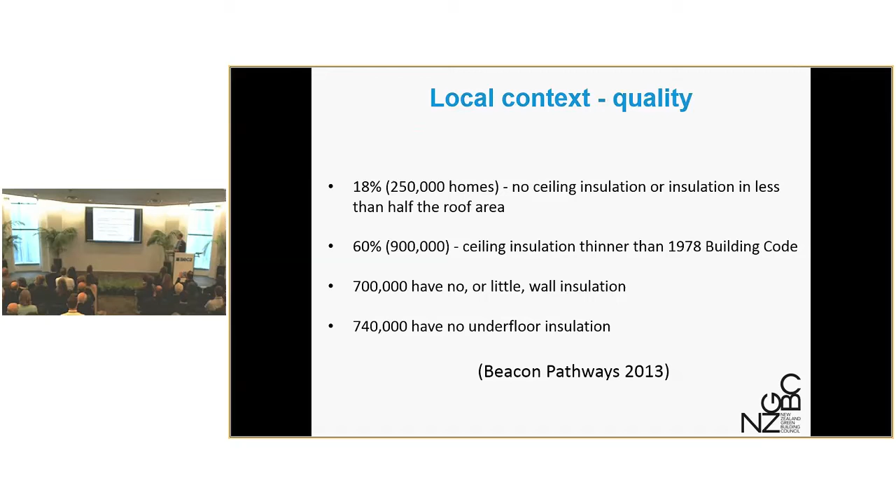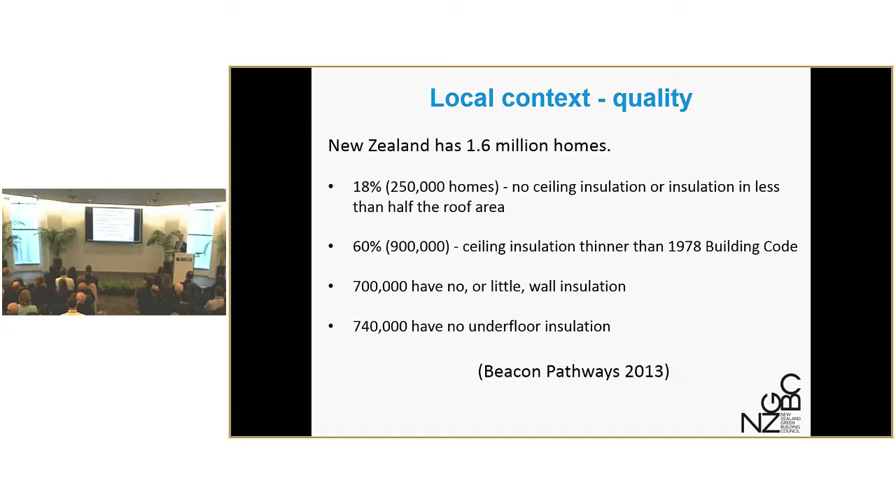Just a bit of context, something I'm sure you'll all recognise. In New Zealand, there's a particular reason for more interest. We have around 1.6 million homes, and a very poor quality housing stock. Just to pick out one figure, we have 700,000 with no or little wall insulation, and this is impacting significantly on many people in our population. We have 40% of our homes that are damp or mouldy, leading to one of the highest cases of respiratory disease in the Western world, costing us $6 billion a year and impacting 700,000 people.

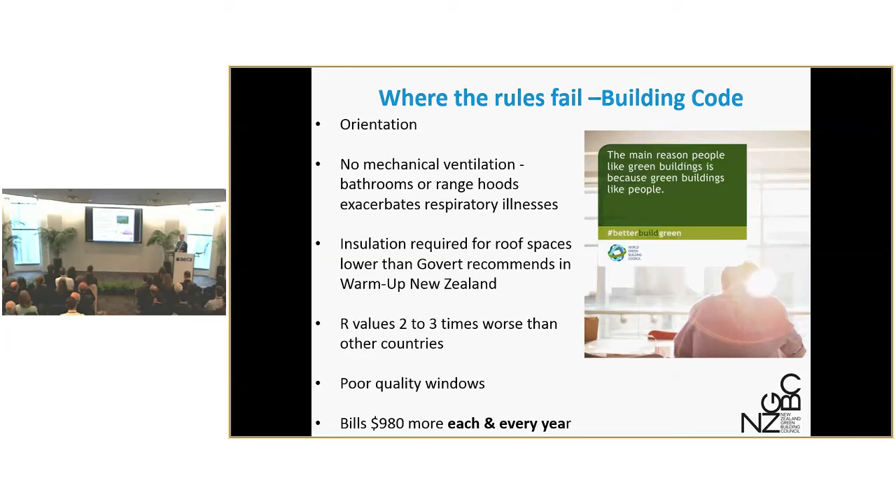We know that the building code isn't working. I've been away for 15 years, I've come back to New Zealand and toured the country. Every single week, somebody tells me how embarrassed they are about the New Zealand building code. Sometimes it's 10 times a week. People say they're just embarrassed by it. Why is that? Well, it's because it doesn't incentivise orientation, doesn't actually require mechanical ventilation in the bathrooms or with range hoods. Insulation required is significantly below what many people would suggest. The R values are 2 to 3 times worse than we see in Australia, the UK and Ireland, to give an example. The windows are not always of decent quality, and all of this leads to significantly higher costs for people.

So we developed a rating tool. The building community and our board and our members said, let's start developing something to drive change. So Homestar was created about 5 years ago to focus on reducing operational costs and a better quality home.

And it provides an assessment of apartments, but also homes, so a range of home types. Interestingly, we've seen a tenfold increase in uptake of Homestar in the last 2 years. We've gone from 650 registrations in quarter 2 2015 up to over 6,700 homes now being registered.

So is that good? It's good, right? Bring it on. We're really excited about that, and as part of me coming on board, I looked at this and thought, well, that's tremendous. Let's get a sense check of whether it's right for the market. That led to a discussion with the industry, and Leanne will talk a little bit more about that, and it led to the version 4 changes that the team took forward.

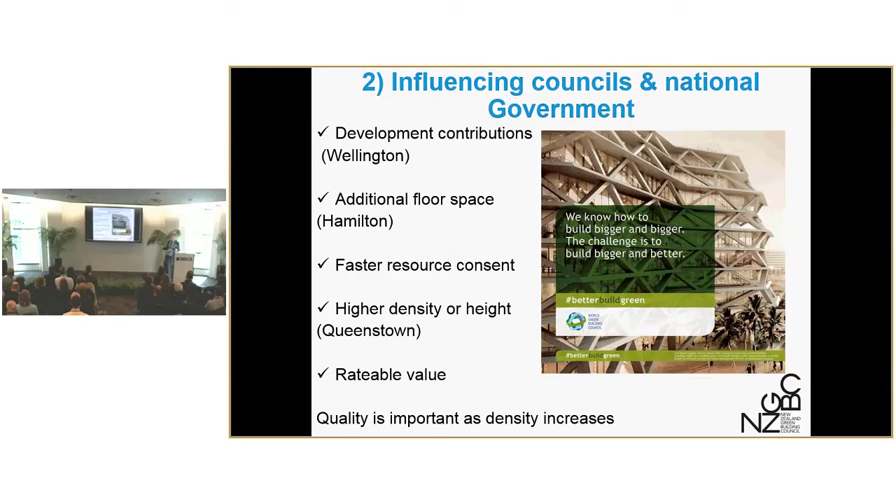We are getting denser as a nation, building closer to each other. As we do that, quality is going to be important, right? Kiwis aren't always used to having someone so close in proximity. So if we can build more sound insulation, more daylight, more warmth, people will be happier in those situations. This is a pretty major issue, I think. How can we deliver improved quality? Well, there is an independent verification system for that.

We're increasing our reach to get more buy-in, so I think this is important to note. We have 30,000 people receiving our different e-bulletins each month, 10,000 people on social media connecting those, and we're getting asked about once a week for media commentary in the press, and having some good discussions with ministers and officials.

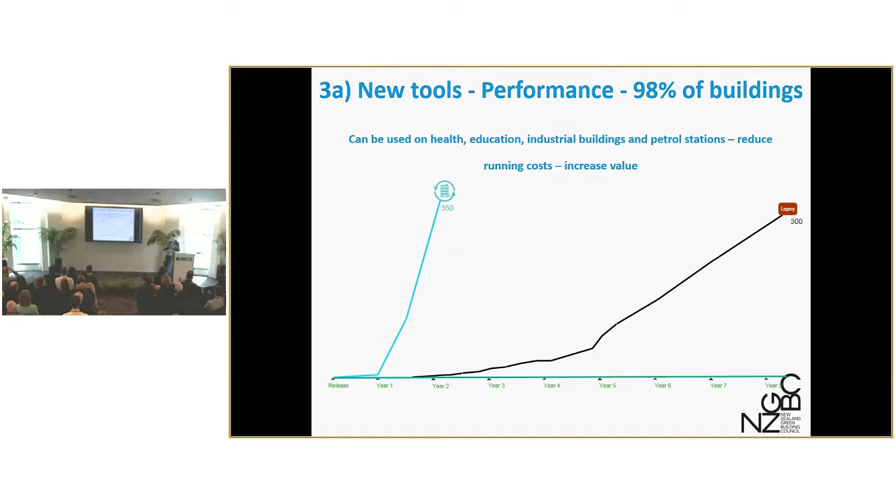I'll skip over this, but we're bringing out a new tool for the performance, the operational costs of buildings. Just to note that it will cover health, education, industrial buildings, and even petrol stations.

Right, so I've almost finished. I just wanted to touch on something which I think is interesting, because, in a way, what we do, it's a bit geeky, isn't it? Rating tools. What are rating tools? People say, what about this great new piece of kit or a sexy thing that we do? We've got a better insulation method or better solar panels.

And that is exciting, but what we're trying to do is fundamentally change the system, right? Not just the occasional building, we're changing how we talk about things. I just want to illustrate to you the power of that and what that can do to a marketplace. So, in Australia, they have a scheme. Does anyone know NABERS? Yep, so a few people. So they had NABERS in Australia, and they brought it in 2007.

He commissioned a report, 130 pages, spent quite a lot of money, and he was asking for them to get rid of NABERS. The report comes back. It finds that the benefits of an energy labelling system for commercial buildings was over $40 million to the commercial building sector of Australia. The productivity and health gains to those people in those buildings was over $140 million, which he excluded from the core analysis.

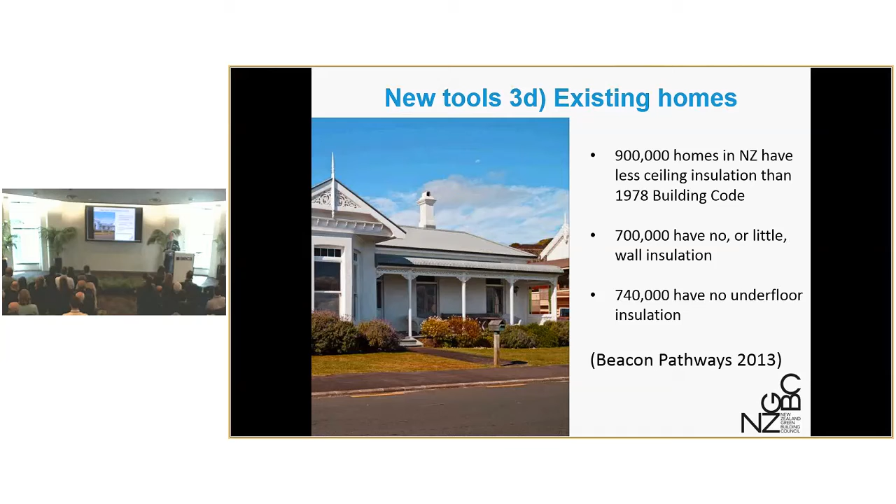Just quickly to note, quietly, we're bringing out a new tool for existing homes. In Homestar, we've separated existing homes from the tool, and in the first quarter of 2018, there'll be a new, simple, easy-to-use tool for existing homes which focuses on insulation, ventilation, and efficient heating systems to deal with this issue. It's called HomeFit. We've got quite a bit of interest in that.

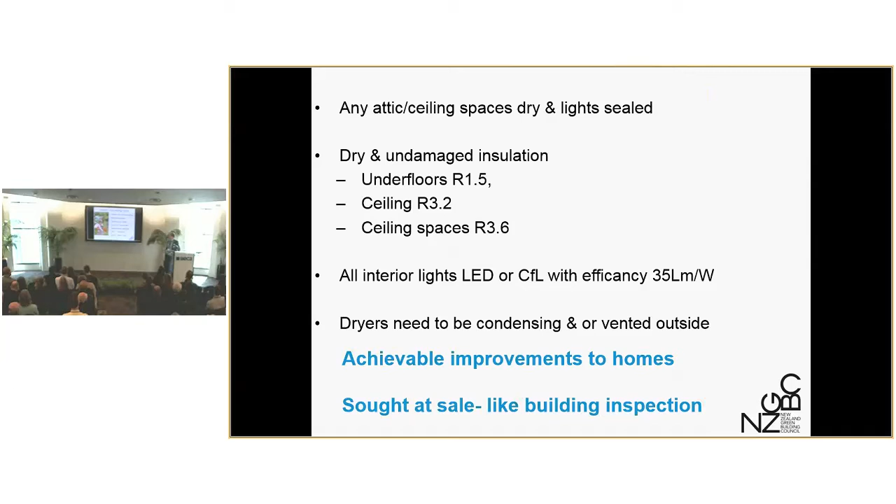So we've created a new tool. We're getting buy-in from government, and we're going around generating uptake and aligning that with the processes you need for an effective rating tool.

I just thought I'd finish with a little story. Some of you probably know this - a house that was pretty cold and damp, and Zane's children were getting sick quite often. They retrofitted that to Homestar, and he could say that his kids were getting sick far less often. So I thought that was quite powerful to finish with a human story.

Okay, so I hope that was useful. Now you guys have to do some work. I'd be really interested in your thoughts on all of that, and if you think we're going in the right direction, or your thoughts, also projects you might be working on and how that feeds in. So I have a bit of this time, and it's also an opportunity for you to ask some questions before we get into the detail of Homestar particularly. So if you have questions or thoughts on any of that, or disagreement, I really welcome them. You can have a bit of time to allow for that.

It says waiting for hands to go up. Well, if not, no, okay, well here's a question: are we on the right track? Does that seem like a good way forward? Put your hands up if you think we're going in the right direction. We'll do it that way. Okay. Now don't feel bad, put your hand up if you think we're in the wrong direction. Okay, well that's useful, and it's all right, feedback's good.

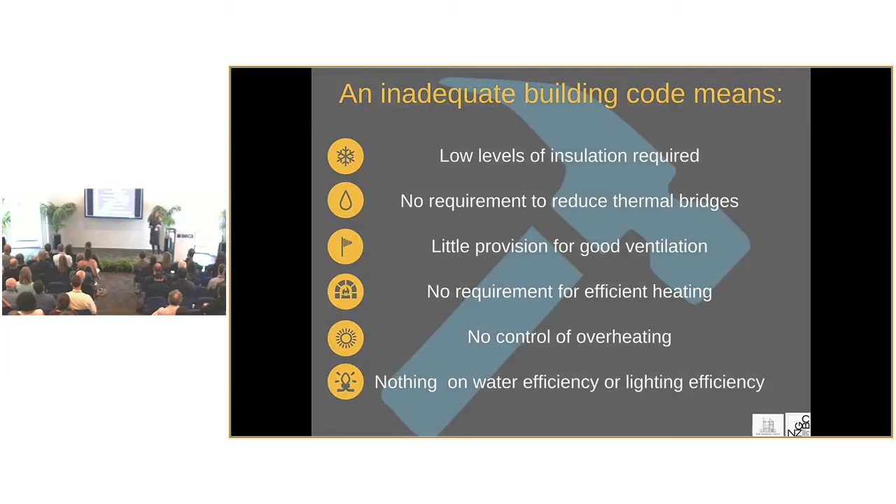Doom, gloom, right? So Homestar attempts to address a lot of these issues and provides a method for verifying that we are achieving in those areas. What's popped up around the outside here are the different categories within Homestar, and you'll see those concepts fit into those categories. The concepts themselves within the Homestar rating tool are the credits—those are the ways that we go about achieving and addressing each of these areas.

So today I'm going to talk to you—I wish I had a lot of time and could talk you through the whole thing and give you all of the bits of Homestar. But I think, A, you would probably be a bit bored after a while, and B, we really don't have enough time for that. So I'm just going to talk about a few of the important bits today. But if you want to talk to me about something you think is really important, or you're interested to know about that I didn't cover, come and find me and I will be happy to talk your ear off about it.

So I'm going to start with thermal envelope performance, which really means we want our home to be doing a good job around the outside—the walls, floors, and ceilings—keeping the heat inside the house and not letting it escape outside.

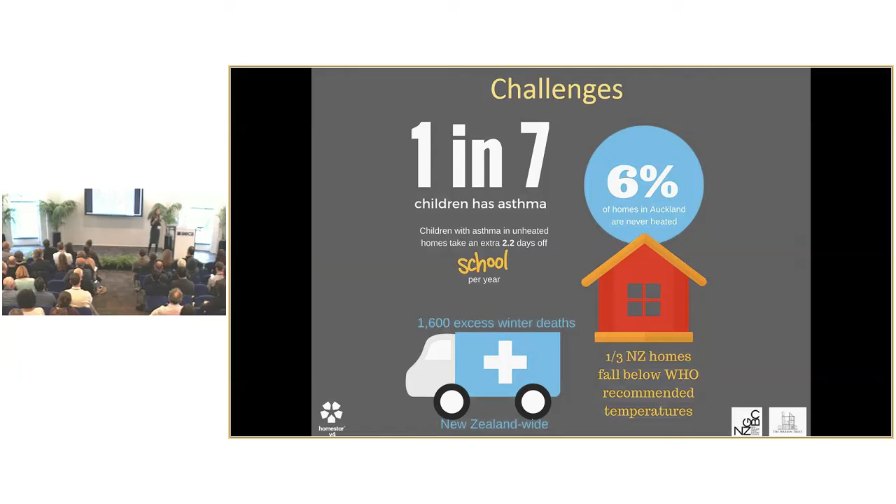And it's cold a good 7-8 months out of the year. We basically live for the 4 months of summer. I then went to school in the balmy tropical climate of Michigan. Those of you who know your US geography know I basically went from cold to cold. So I came here and I have never been so cold inside a home than when I moved here, and that was a long time ago.

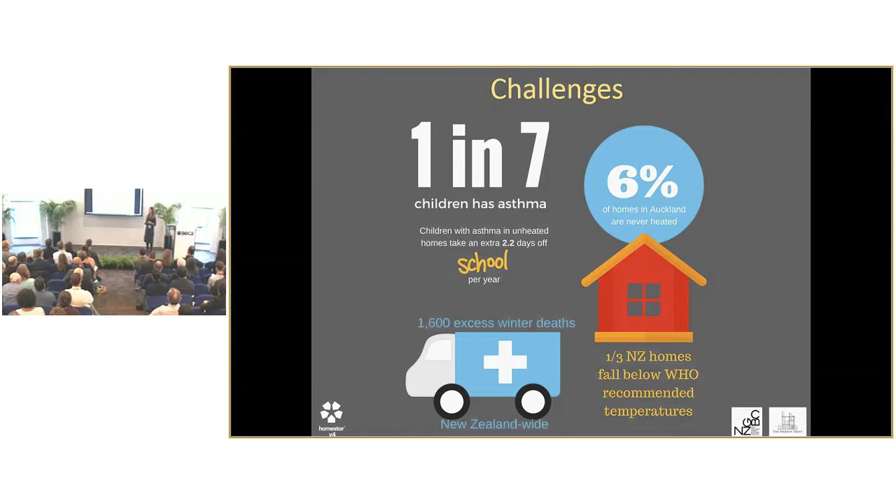It was 14 years ago. And I continued being cold for a very long time, until I think my husband got really sick of me complaining about being cold all the time, and we built a passive house. I'm not cold anymore, and it's fabulous. But the point is that we actually have really cold homes. And you meet a lot of people from overseas who come from cold climates, and they complain about the cold here as well. Am I preaching to the choir? Yes, okay.

Aside from those challenges, the house condition survey showed us in 2015 that we have a legacy of poorly insulated, damp housing with inadequate heating. The International Energy Agency just did a review and said the building code is below the standards required in many other countries.

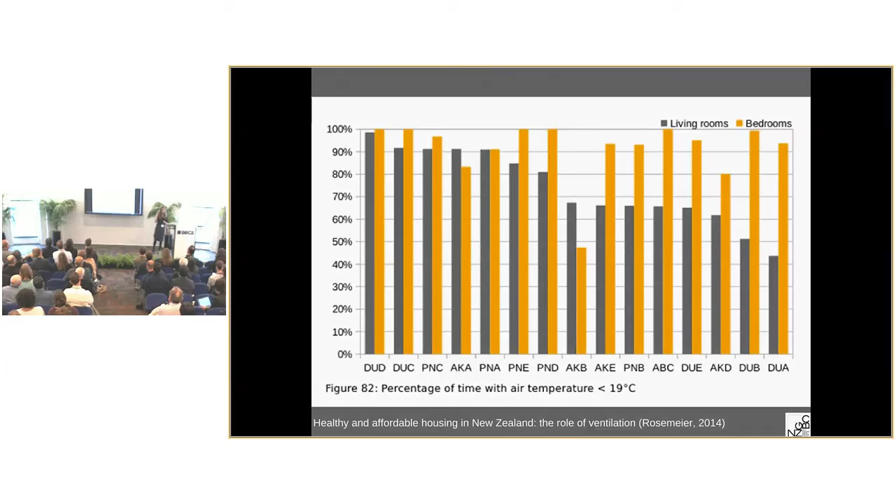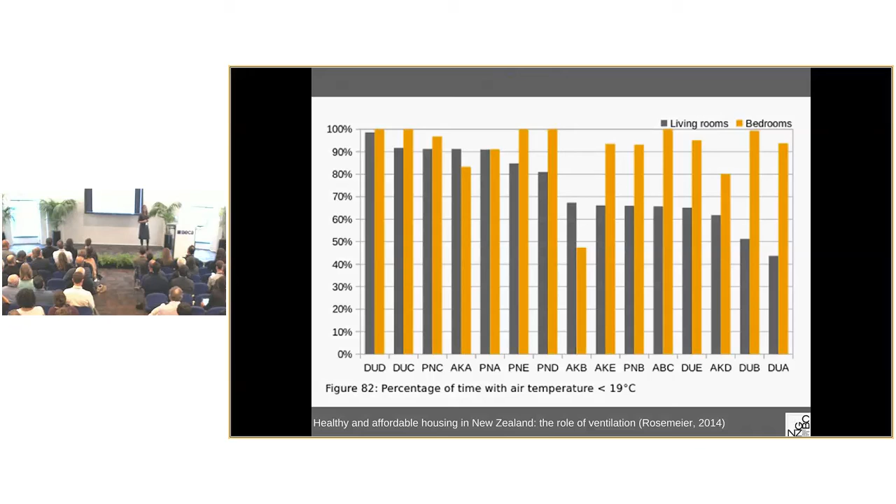Now you say, what about new homes though? Surely not our new homes. Well, this study was done on homes constructed post-2000, a range of typologies across New Zealand. What you're looking at is the percentage of time they were monitored over 2 weeks in winter, specifically the percentage of time air temperatures were less than 19 degrees Celsius. The yellow is the bedroom, the grey is the living rooms. They didn't do very well, so even new homes are still not doing well. Not all new homes, but a lot of them aren't.

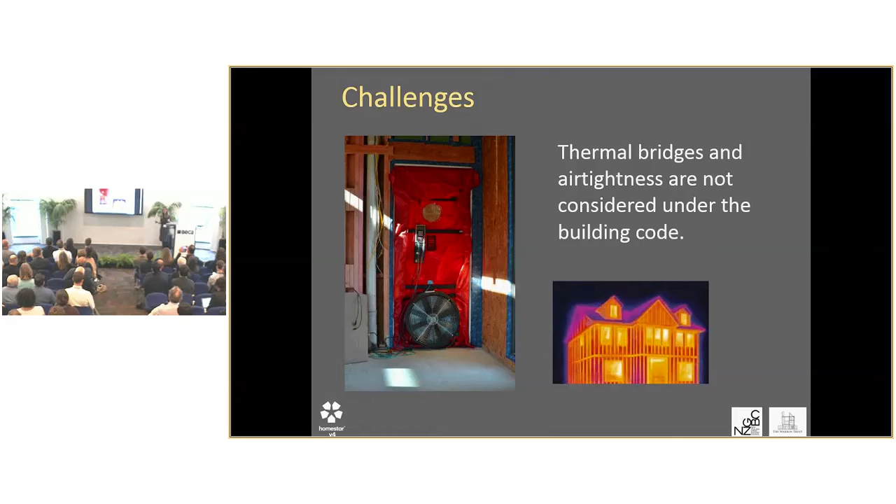And we also, as I mentioned before, thermal bridges and air tightness are considered in other countries. The UK, for example, has standard air tightness testing now. They are considering these things.

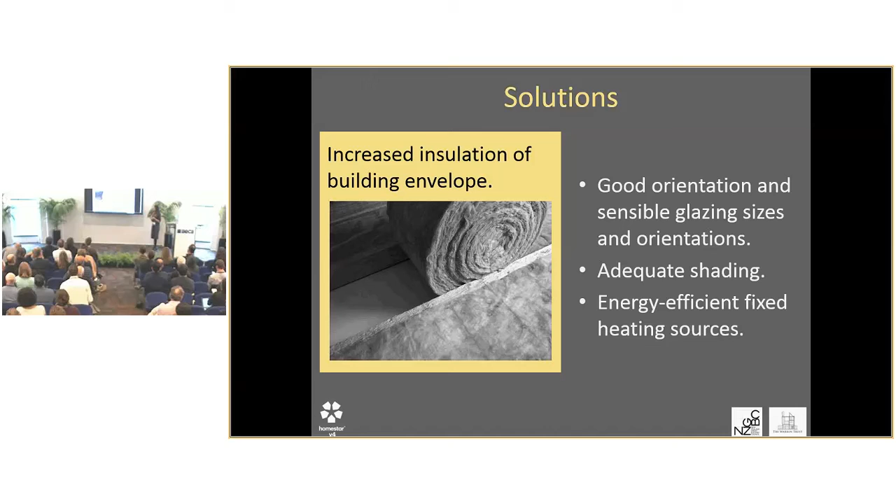So now that I've totally brought the tone down here, what are some solutions? We can increase the insulation of our building envelope - that's not just our walls, it's also our ceilings, our floors, and our windows as well. We can think about good orientation, potentially sensible size of our glazing, the orientation of that glazing, and having an energy-efficient fixed heating source.

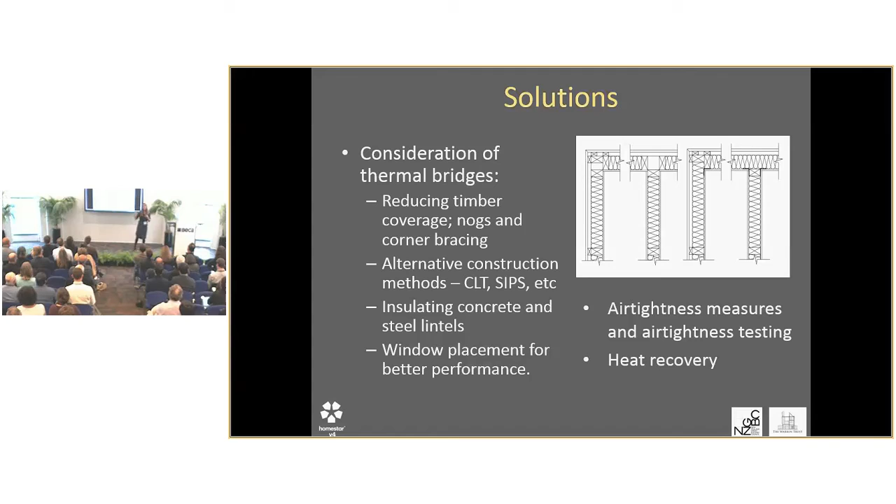So some other things we can do: we can consider thermal bridges. Now, I'll point out that I'm going to talk about some commonly accepted, very small steps, and also some more aspirational things. There will be some controversial things I say that you don't necessarily agree with, but I'm going to mention them because they are practiced - most of them have some sort of industry-based practice internationally, and I do want to touch on them.

So there's other things we can do. We could reduce timber coverage - that would mean reducing the amount of nogs we use, reducing the amount of corner bracing that's put in. If you don't want to do that, consider alternative construction systems that reduce thermal bridging, things like SIPs or CLT panels. Making sure that if you've got concrete or steel lintels penetrating through your thermal envelope, that they're insulated from the outside. We can change our window placement so it's in line with the thermal boundary of the house rather than sitting outside of it.

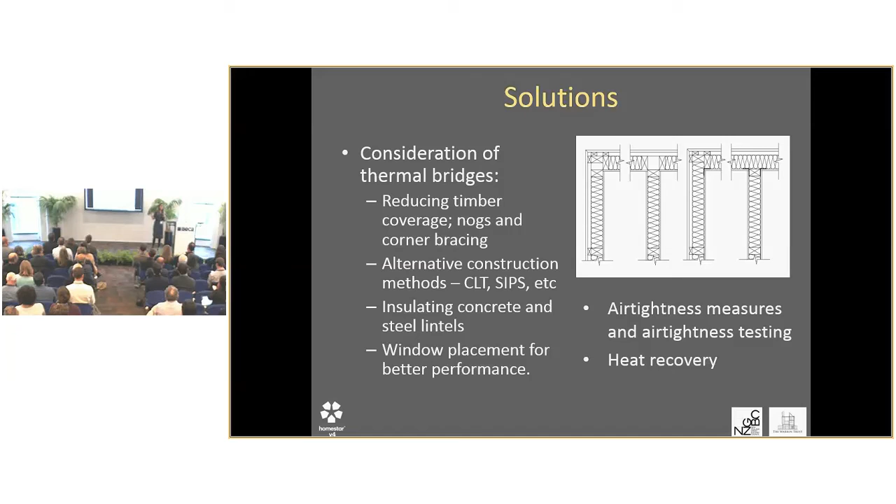Air tightness helps to decrease the amount of heat that's lost from the home. And with that, heat recovery helps us trap that warm air and recycle it back through the house with fresh air that's being brought in. So, all sorts of solutions.

Now, what does Homestar look at? Homestar tries to be, and we are, pretty accepting of a lot of different methodologies. Even if something isn't listed in the Homestar tool, we let you apply what's called a credit interpretation request - meaning if you've done this really cool thing and it still meets what we've asked you to do, we give you that pathway to try new things. So it's a bit of a staged approach: we offer some suggestions for people who want a little hand-holding and guidance, and we also offer more open-ended approaches as well.

So for the whole house thermal comfort credit, we have made some significant changes here. I'm not going to talk about the way it was, I'm going to talk about the way it is. This whole house thermal credit in Homestar is essentially looking at the thermal envelope.

Now for 6 and 7 Homestar, which is our baseline standard, we have developed a schedule method. This method, which I'll show you in a couple of slides, is very much like the H1 schedule method in its approach. In fact, any home that can use the schedule method for H1 can do the same for Homestar, so they have the same eligibility requirements.

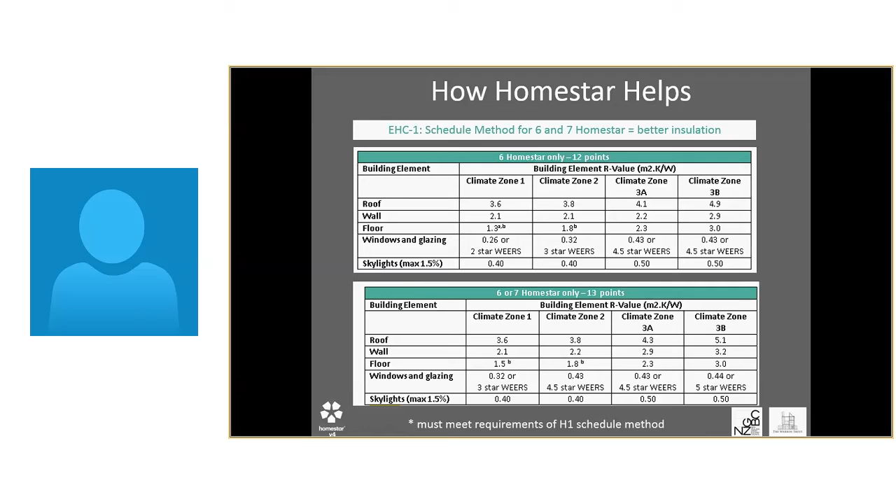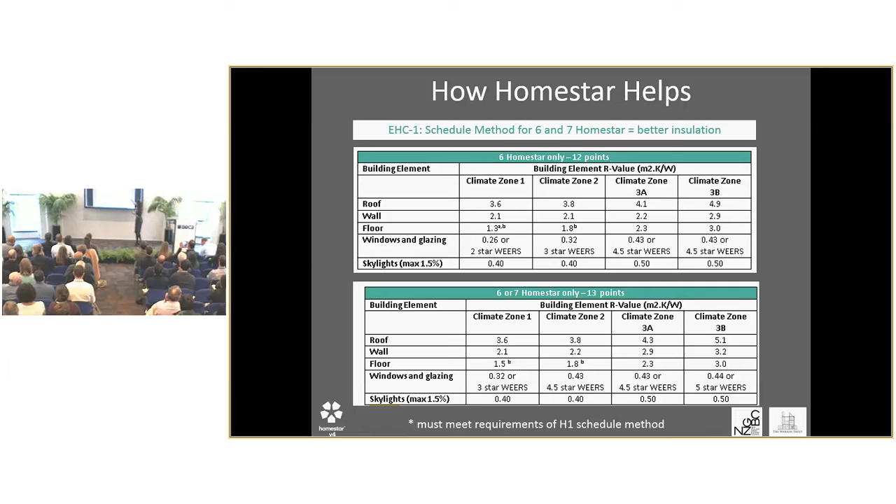Now, those numbers may not mean a lot to some of you, others it may mean something to. For those of you it doesn't mean much to, I'll give you a peek at our schedule method, because this really gives you a precise idea of the expectations at a 6 and 7 Homestar level. You can see these are construction R values across the different parts of the house - that's roof, wall, floor, windows, and glazing.

Now, we have broken it into - you'll see and think, that's not what is in H1 - we have broken the zone 3 climate zone into two bits. That's because it gets really cold in Queenstown, Wanaka, Cromwell, Central Otago, and the Western Waitaki. So we ultimately split those two out because they actually need to build a lot more insulation in there to hit those targets.

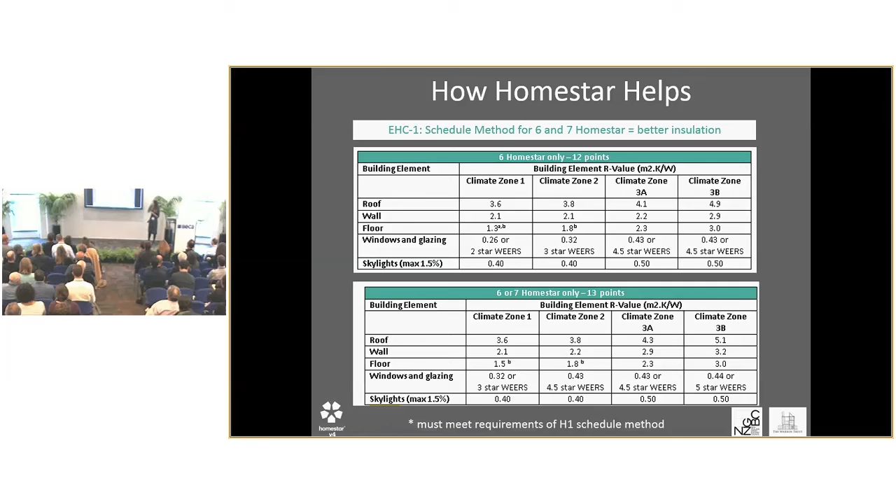Now we also need to consider overheating. This is a real concern, particularly in the temperate climates of Auckland, but there are plenty of other regions in New Zealand with a high number of days prone to overheating. This is particularly an issue when we're putting a lot of glazing in our homes, which we're seeing more and more - people want that nice open plan. Unfortunately, sometimes they end up with an entire glazed wall on the western side, turning the home into a bit of an oven for 3 or 4 months of the year.

So we have developed what we call a simple method for minimizing the risk of overheating at the 6 and 7 star level. When you undertake energy modeling, we're expecting that you will look at this as well, but at the 6 and 7 star level, we have a slightly simpler methodology.

Just like how we're going on time - I have a tendency to blather on here, so here we go.

So moving on from the thermal envelope and looking at how we're heating that space. So now we've got a nice thermal envelope, it's doing well, now we need to put some heat in it and trap that heat inside.

So Homestar is now expecting that there should be a fixed and efficient heating source as a minimum in the living area.

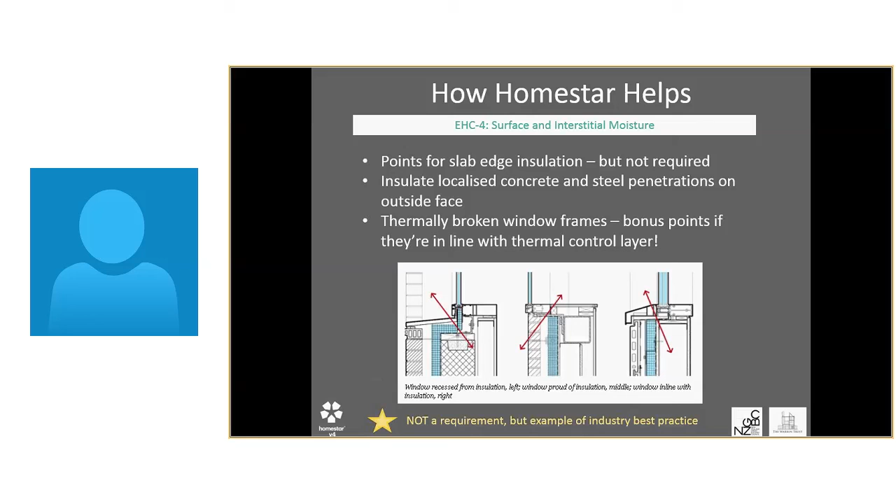So I touched on thermal bridging, and this is where I start getting into the slightly more contentious topics. I am going to talk on it now. So this straddles the line between thermal performance and moisture. We talk about this now with regards to thermal performance, and then we're going to jump right into moisture after that. You'll see at the top that this is a moisture topic.

So Homestar looks at thermal bridging with regards to having slab edge insulation. It's not required in all the climate zones, but you get points for doing it, and more points for doing it well.

We also award for insulating localized concrete and steel penetrations on the outside face, and putting in thermally broken window frames. You get even more points if your thermally broken window frames are brought in line with the layer of insulation. There's a little diagram here for those of you who are interested in that sort of detail.

Now, we were hoping to come out with a standard detail for that. We don't have anything available at the moment, but a lot of the window manufacturers are working on creating a standard detail for this window placement. It's our hope that as more and more people start exploring this methodology, it'll become more standard practice, and you'll see more standard construction details coming out with this.

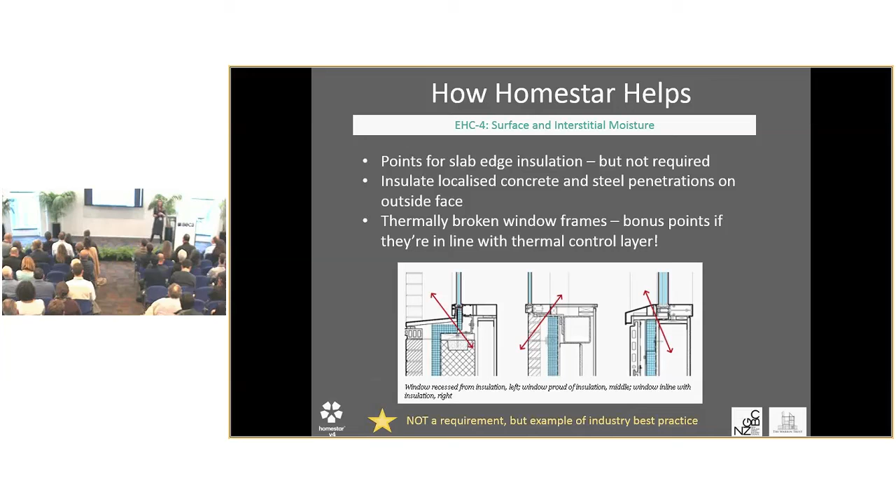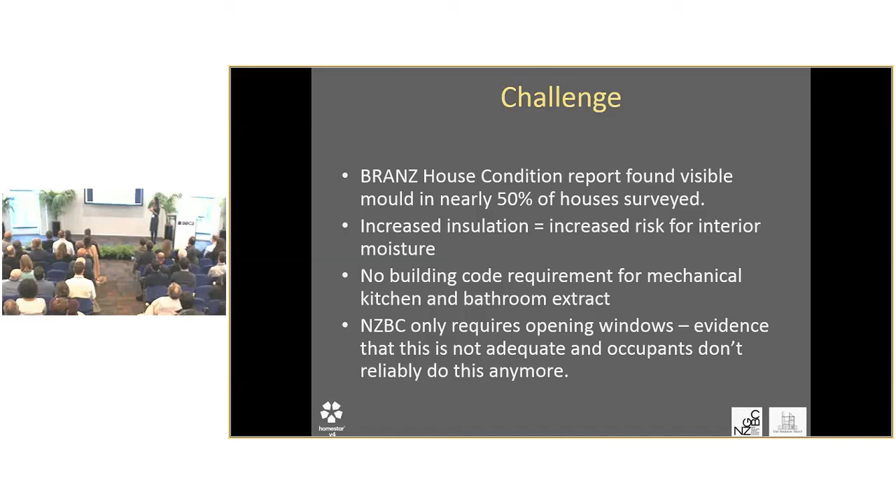So what are some solutions? I'm just going to wade right in now. Better ventilation is a really good solution, right? We can all agree about that. So intermittent localized extract is a good start.

This means that in our bathrooms and kitchens we're making sure that we have a fan that is extracting moist air from those areas outside. Not to our attic, not to our soffits, outside, right? And not in like 30-meter runs through the neighbor's garden and then back out and then through the doghouse and then maybe outside, okay?

Overseas evidence does indicate a preference for whole house ventilation.

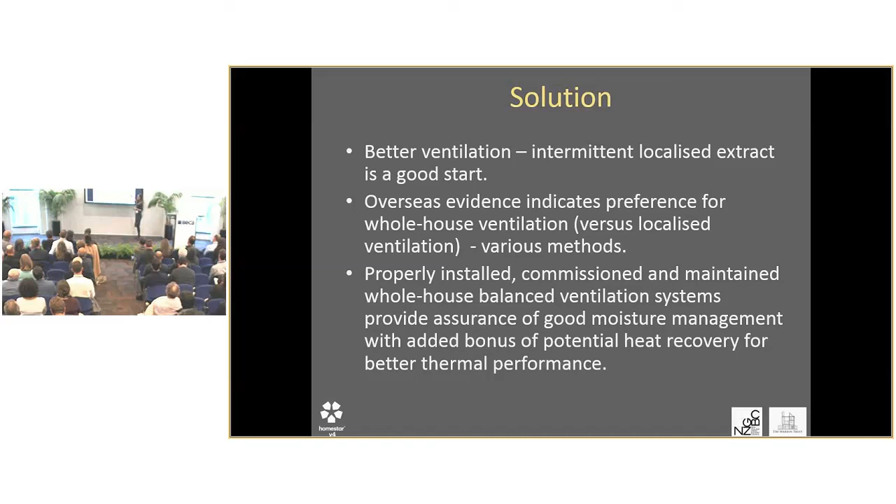This is where I'm just going to jump right in. Properly installed, properly commissioned, and properly maintained whole house balanced ventilation systems do provide assurance of good moisture management. And with that, they have the bonus of being able to have a heat recovery system put on them, which allows for better thermal performance. Now, I am not saying this is necessary for all homes, but it is an important thing to consider as a benchmark for excellent achievement.

So how does Homestar wade into this rather big debate area? Well, as a minimum requirement, require kitchen and bathroom extract and windows with a net openable area of no less than 5% of the floor area.

These need to have lockable stays on them, and this means that people are more likely to ventilate if they don't have security concerns about people coming in through the windows who shouldn't be coming through. And I say who shouldn't be coming through because my son regularly uses our window as a door.

And also, the other option to that would have background ventilation.

So looking at this, essentially what we're looking for is intermittent extract ventilation as the starting point, and then from there we build up continuous extract to balanced with heat recovery, and then there's a bonus point for the balanced ventilation systems that if they're properly commissioned, then you can have an additional point on there. Obviously, the better commissioned the system is, the better performance you're going to get out of it, and it's really important to do that with those balanced systems.

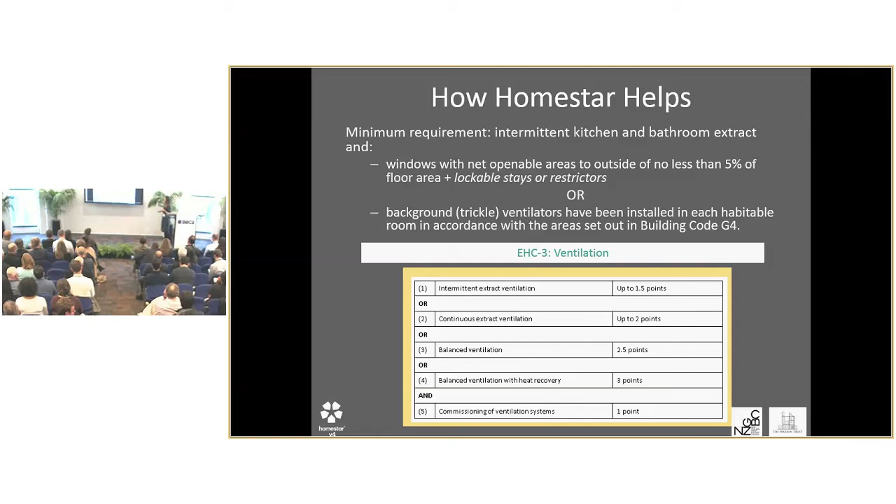Right, so we've talked about the thermal performance of the house, we've talked about moisture management, and then the last thing I really want to touch on, which is water, and it's something else that we feel is really, really important when it comes to sustainability of a home.

So the two things that I'm going to talk about are water conservation and management of our stormwater. So what are the challenges?

We have infrastructure challenges, particularly with regards to stormwater runoff volumes. We have erosion and pollution of our waterways, and inefficient fittings and fixtures that result in a lot of water wastage.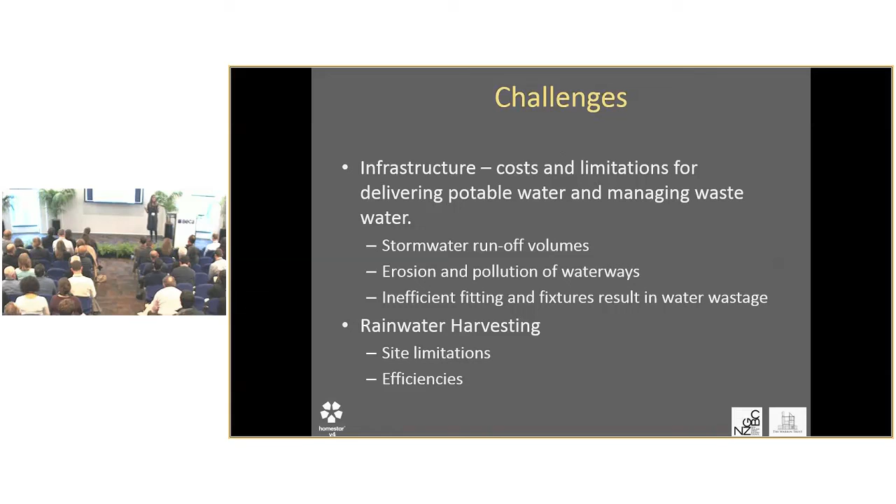With rainwater harvesting, rainwater harvesting provides a solution, but there's also challenges that come with that with regards to this sort of intensification and density that we're seeing. So there could be site limitations and questions around efficiencies of rainwater harvesting when you're building intensely or at density.

How does Homestar look at this? Well, forgetting the flooding for the moment, with regards to our water wastage, we look at the water use of showers, lavatory equipment, so toilets, and kitchen and bathroom taps.

Now, the shower flow rate is interesting because not only does it have a benefit with regards to water use, but it also has its own benefit of minimizing the amount of hot water that needs to be heated to provide to that shower, which can have a pretty significant effect on your hot water heating bills.

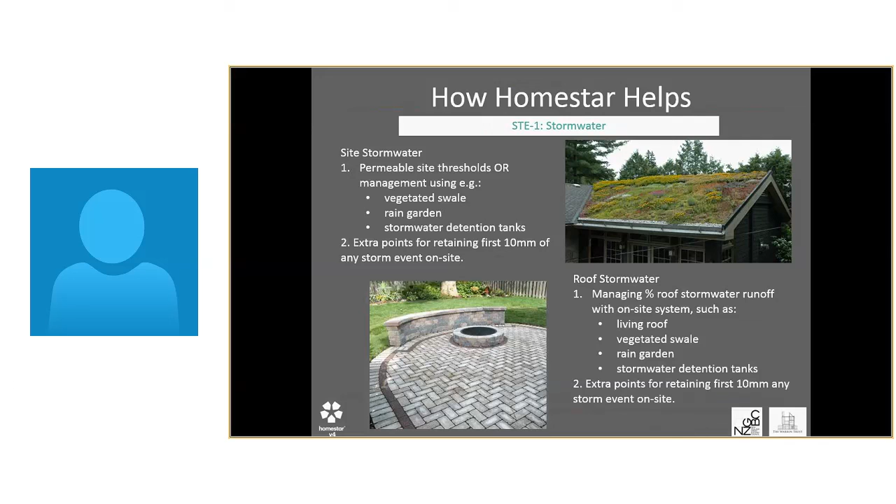With regards to stormwater, it's divided into 2 sections. One is the site stormwater, and the second is the roof stormwater. Now, for the site stormwater, we're looking at permeability thresholds or an ability to have a stormwater detention on site.

There are extra points for retaining the first 10 millimeters of any storm event on site. This is an interesting one, because what we've learned is that the most pressing issue with our stormwater actually isn't these 1 in 20, 1 in 50 storm events.

It's just the normal everyday rain we seem to be getting all the time at the moment, that ongoing daily rain. And because that's the issue, this is really trying to address that, rather than the 1 in 20 or 1 in 50 events. That's been the big change we've made to this portion of the tool at this point.

The other side is roof stormwater, and again we're looking at the percentage of roof stormwater runoff being managed on site. That might be a living roof, a rain garden, or stormwater detention tanks dealing with that. And again, there are extra points for managing that first 10 millimeters.

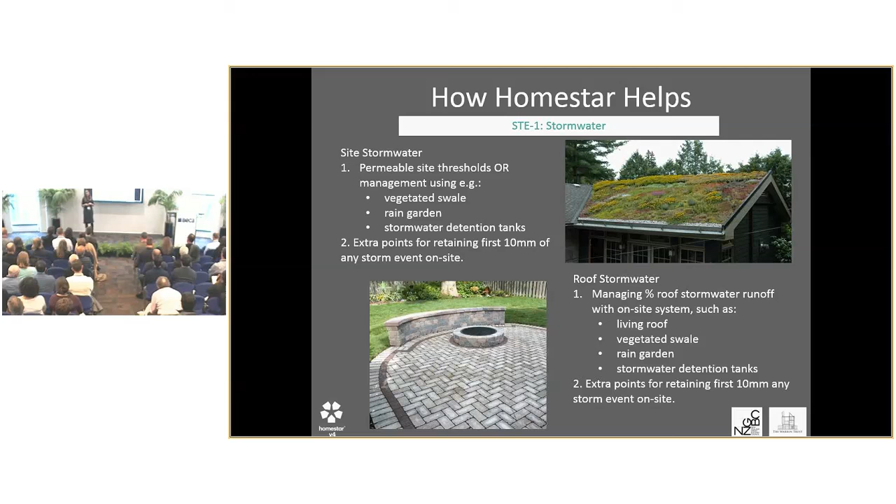So those are three areas I've touched on, and as you can see, there's a lot more in Homestar. Now, do you need to do it all? No. As you move up the star bands, you're probably going to need or want to do more to get those points, but as a baseline, you don't need to do it all. In fact, you should be choosing what suits your site, your dwelling, and yourself or your clients, and making decisions from there.

Some of the other areas are things like materials with eco-label certifications and or low VOCs, proximity to public transport, provision of amenities on site, construction waste minimization, minimizing or managing your own internal waste on site, whether you have recycling bins, sound insulation, and so on and so forth.

So, as I said, I'm not going to talk about all of those today. I think I've touched on the big, beefy ones for the moment. But I do want to, at this point, recognize some of the people who have really been leaders in Homestar up to this point.